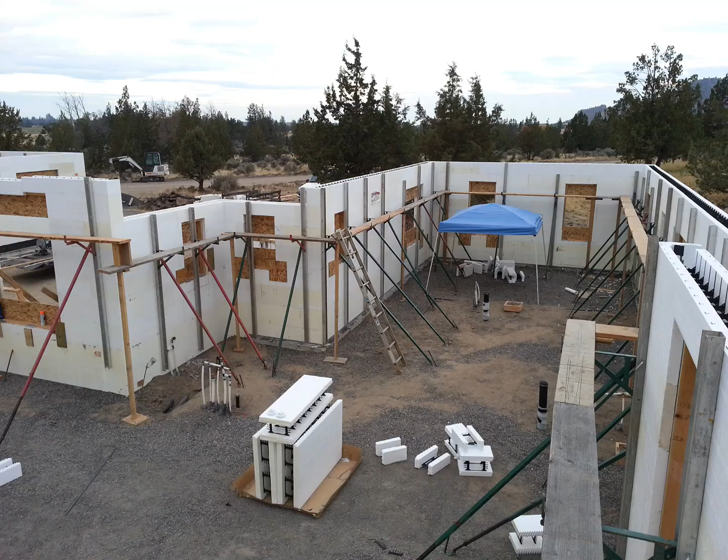ICF, if you don't know what that is, that's styrofoam Legos basically, with a 6-inch void. It's 2 layers of foam and 6 inches of concrete that you fill in the middle. You can see the pictures here - these are ICF blocks, and you can take them and put them all together. Two guys can frame an entire house in a weekend. You just cut these things with a regular saw and stack them up, and there's a little bit more to it than that, but not really a whole lot more.

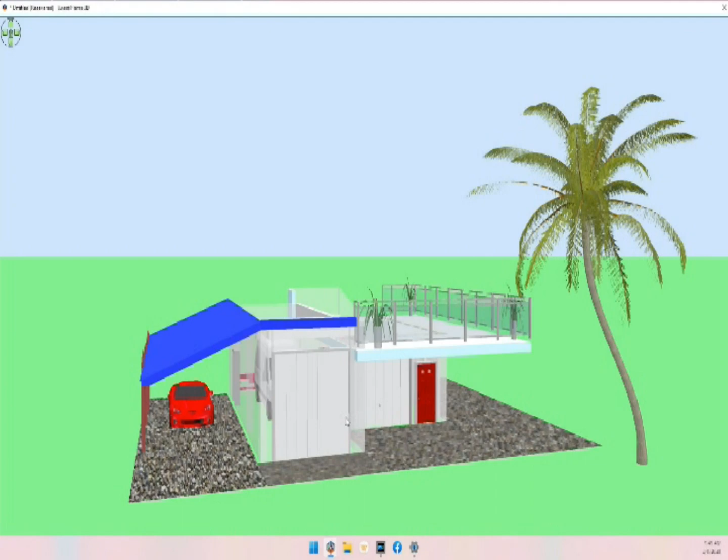So I'd like to build an ICF project out of these blocks, and here is the one I'm drawing. You can see that this ICF house - that's the bottom level. It's got 2 garage bays, and then a carport here with a Corvette in it. The walls are transparent on my drawing here.

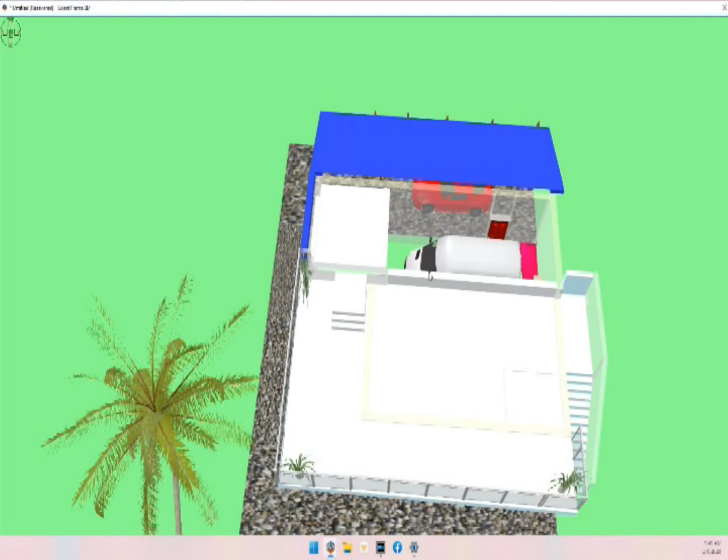You can see up top we've got this big deck, and then a little floor that's a bit higher than the deck - if you look at it, this is a couple feet higher. There's stairs going up to it, and then this area of the ceiling is open for a taller room, so that I can put a 4-point car lift in there and raise up a Sprinter van. Sprinter vans are like 9 feet tall, so it's got to be a really tall ceiling.

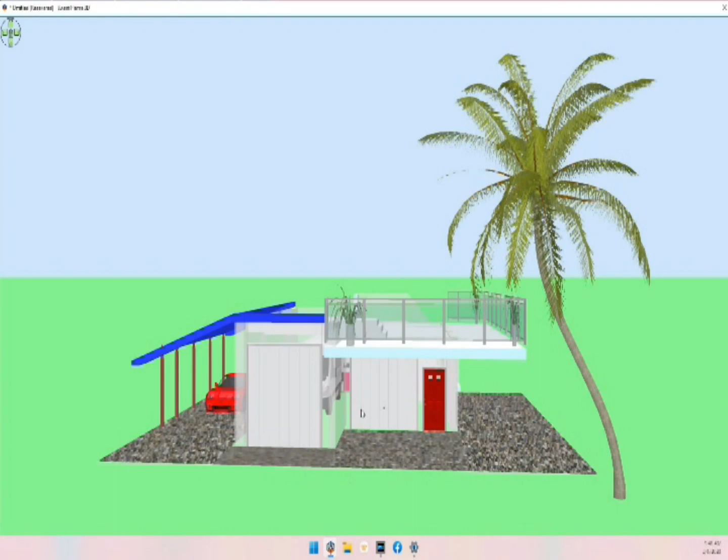Down below is a covered area. It rains a lot here. Although this looks like a sunny vacation resort style garage, I'm actually designing it to get out of the rain, because we get a lot of rain. So you've got this under area over here, with waterproof concrete decking up here. I've got the big patio doors - you can see through the wall. There's a restroom downstairs and a little door here.

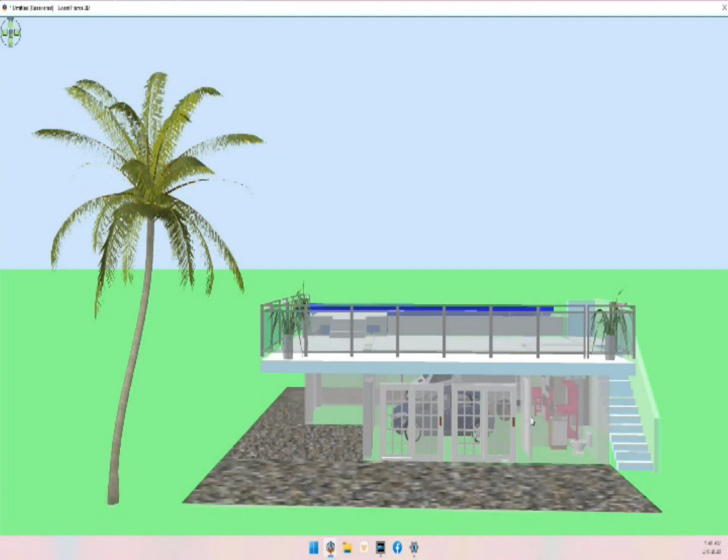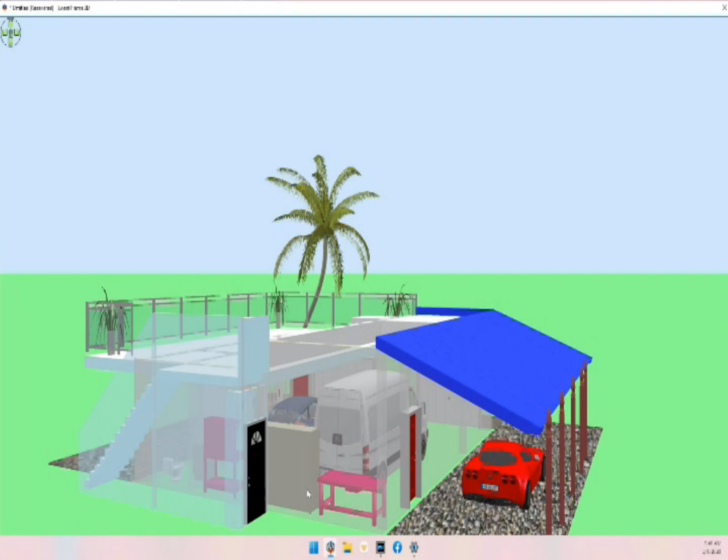And then I built these stairs here - you go up the stairs in the back, up onto the deck, and then you can see through these bluish colored walls. I put a door here where there's lots of storage under those steps. You can put mowers or bicycles, or have this as your room where your hot water heater and air compressor and things like that might be. And then I put a door over here by the Corvette, so you can go into the main part of the shop. That's pretty neat. Those posts here aren't really the right posts - I didn't see the ones I needed, so I just used those.

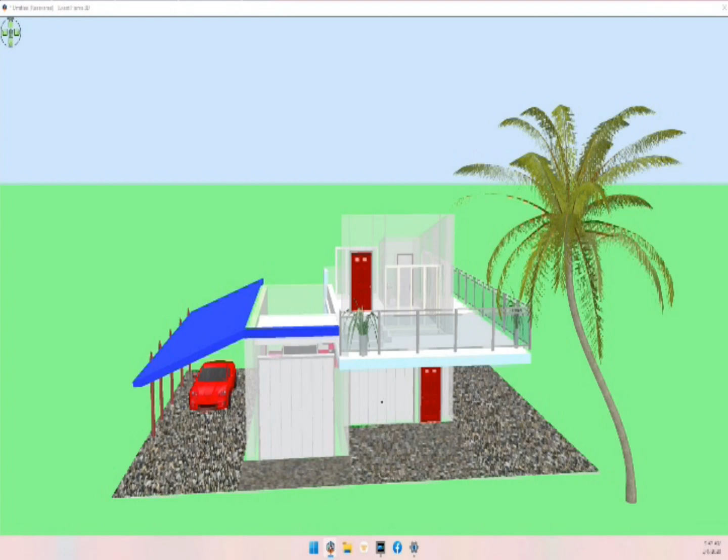So that's that, let's see the rest of it. This is the second part of the house building, kind of added to it. I added some walls - you can see I added this room here.

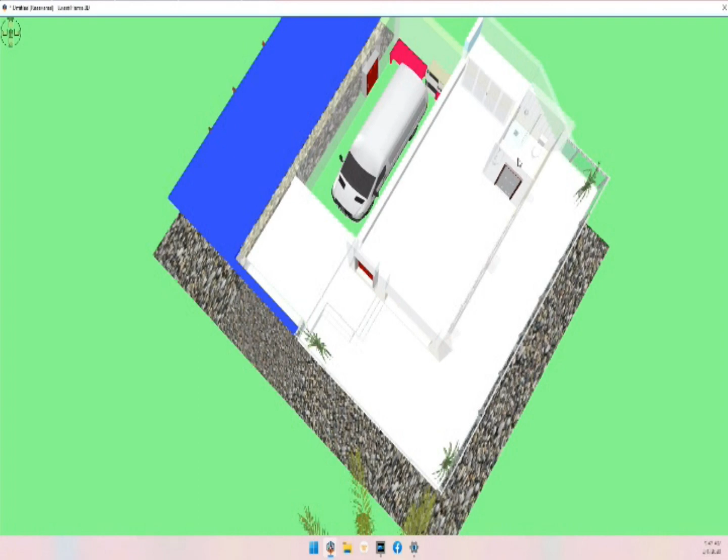And got the restroom upstairs with a shower in it. I don't know if you can see that - there's a shower right here, and a toilet and a sink in there. It's not a huge room, but it's a room with lots of windows and light, and it'll be warm in there, especially on a cold day.

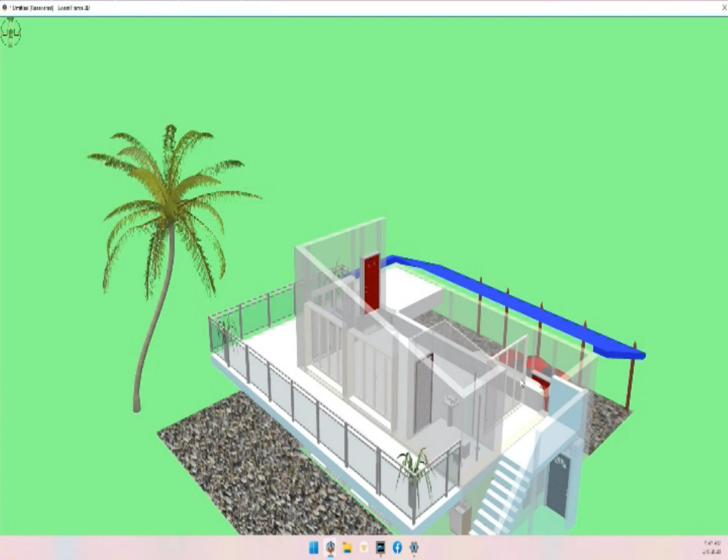And so to get into this room, you've got to come up these stairs on the back, and then there's a little patio inset over here with a sliding door going into that room. So that'd be cool. And this door, I'm not done with this one yet.

There's going to be another little platform here, and you'll come in this door or come up the stairs, kind of like this one on the front, and you'll see that'll be the access way for the crow's nest, which I'm about to show you.

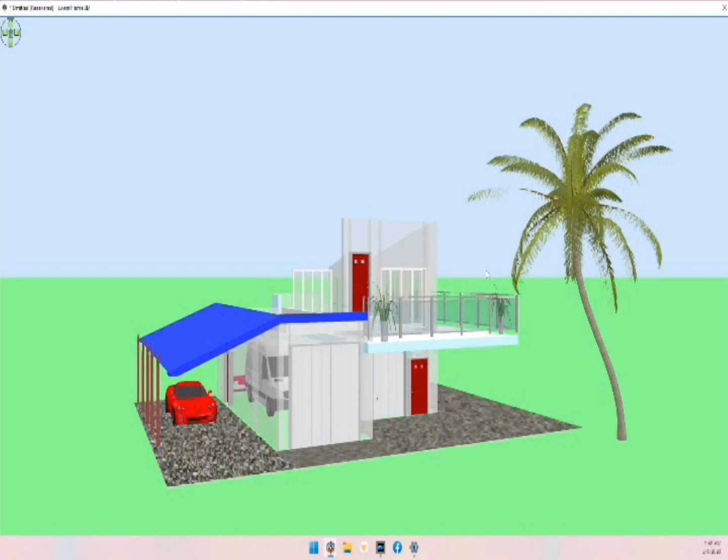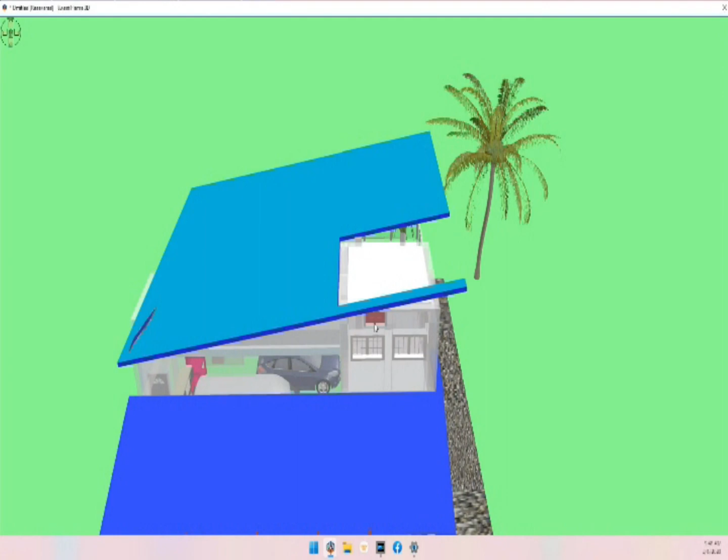Okay, so let's go ahead and progress a little more forward, and then we add this room here. This room is where you walk up the steps, you go into this room. It's got 9-foot ceilings, and that will be like a soundproof studio room for creating, just having an office.

Or a sound room for making music or something like that. Not a huge room, it's like 12 by 12, I think, or maybe it's only 10 by 10. Not real huge, but still, it's a nice little room.

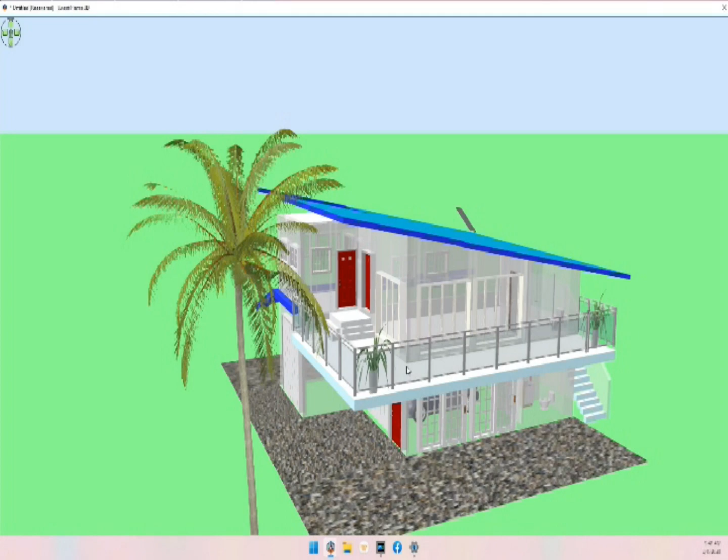You step up, you go in there, or you can come down here, and you can see the roof covers the deck and keeps everything dry. And when we get all that rain, the roof is nice and big.

Solar panels - I've got one solar panel here, and I'd like to cover the whole thing with solar panels. So any plumbing, instead of going through the roof, I want to reroute it and turn it out the side to make sure that I can have lots of solar panels there.

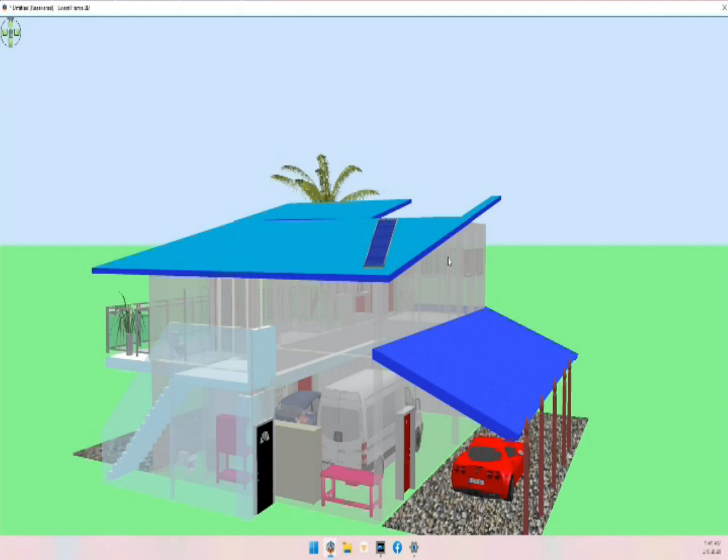So moving forward, you got this space on top. You're probably wondering - I wanted an observation deck or crow's nest, and so I threw this on there, and I really like it. That's where this door here goes.

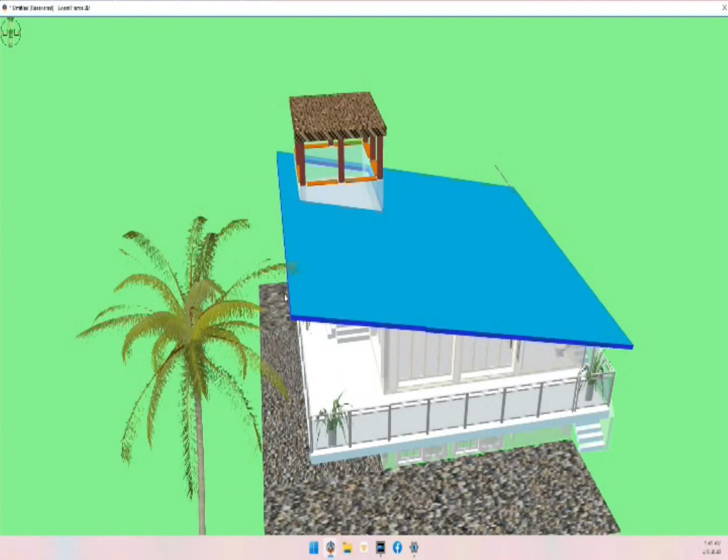You go in this door into that room, and then up the stairs, which I haven't actually created yet, and you'll come up here and go into this little crow's nest where you'll have a bird's eye view from up high, and that's where you can have the little gas fire pit or something in there and just hang out with your family and friends.

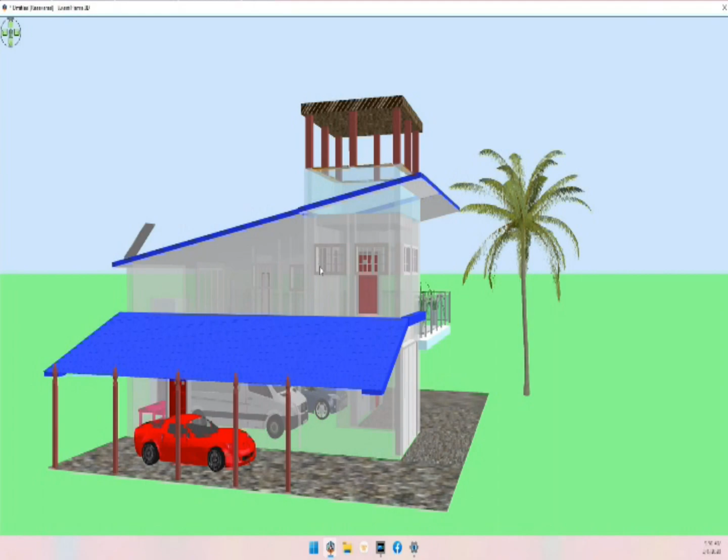That will be just a really nice little place to hang out and get away. If you got a big event or a party at the house, and you get your people up here on the deck, and some of them will go in there and go up on here.

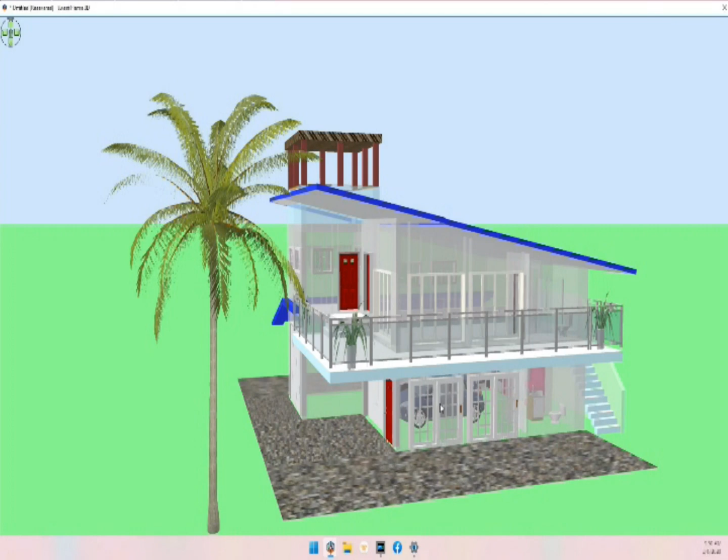And a couple of the nerdy guys, my nerdy buddies and me, would probably go in there in the little room, the studio room, and then the wife will probably be up here and down here and in this bottom room. You just pull that car out and there's more space, and they'll be having their barbecue and cooking and chatting.

And talking. Of course, outdoor speakers need to be installed around the roof line of this place, for music and stuff. And I'm not sure if I want to make the roof overhang over these stairs or just leave them the way they are.

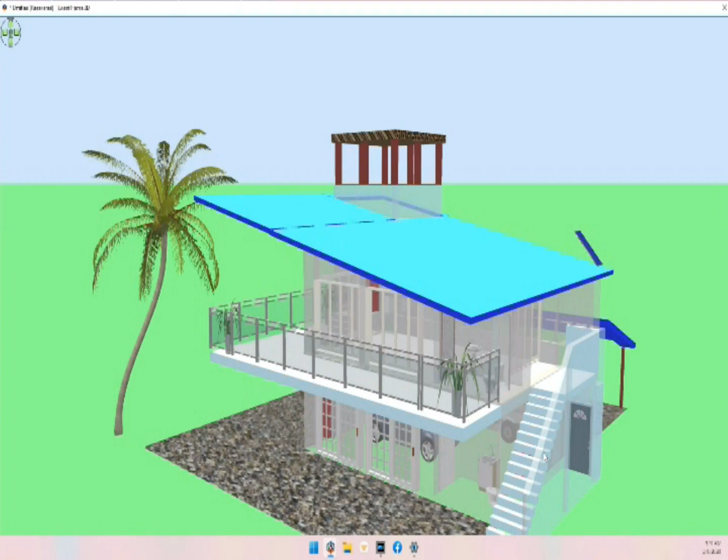But you see the little fancy little thing I got here, and I've been working on it for a few days, just trying to figure out how to make it happen with this program. I haven't used it in a few years.

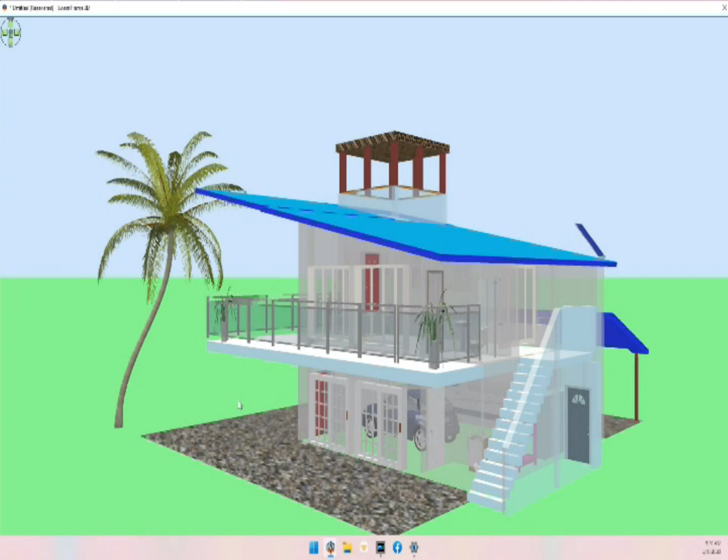It was on my old computer, and so I just re-downloaded it, actually from Microsoft, but it's called Sweet Home 3D, and you can get it, you can just buy it online. I think it's even free.

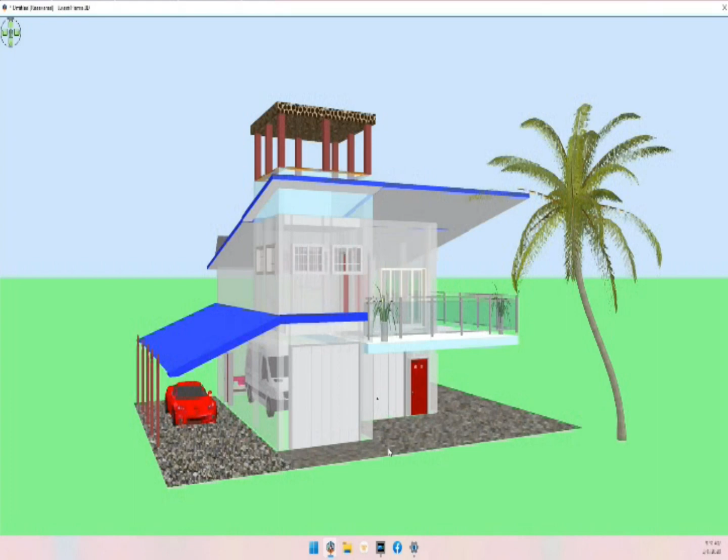The version I got from Microsoft came with a lot of furniture and doors and windows and railings and stuff, and so I don't have to search the web to try and download and add that stuff to my project. It's already included in the version I got from the Microsoft store.

So I hope you liked my little project, and I hope that you found it interesting. I would like to get plans drawn up for an ICF building, and so yeah, tell me what you think.